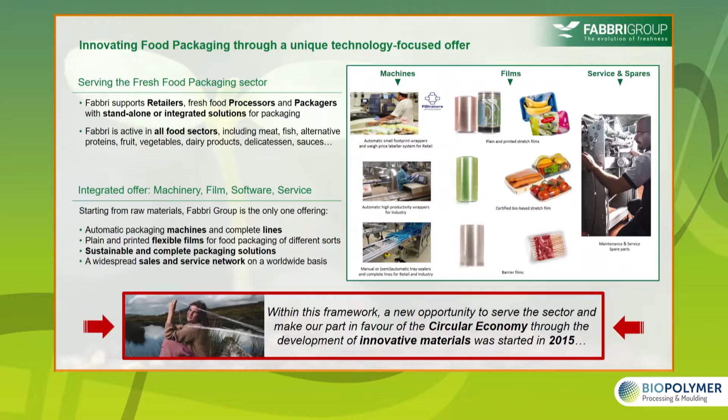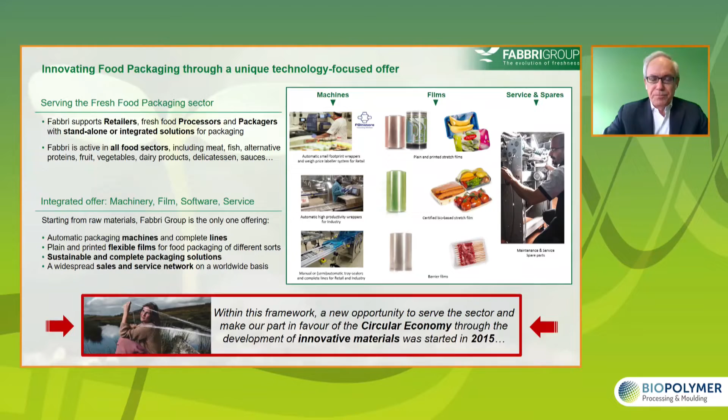And we do it with a full range of products for automatic packaging, as well as with plain and printed flexible films, among which we have been developing through time sustainable and complete packaging solutions. In this strategy, we considered supporting the circular economy with innovative materials, with a project that was started in 2015. We believe that we need to have a more sustainable solution, and for this reason we developed Nature Fresh.

What is Nature Fresh? It's a compostable certified cling film that can be used on our machines as well as those of our competitors. It's a film that is printable with compostable inks, has a very high water vapor permeability, even higher than traditional films, and offers full protection to the freshness and properties of the product, and therefore is ideal for any kind of fresh food. We have been developing this project with the support of the European Commission within Horizon 2020.

And here we see the Nature Fresh features and benefits. First of all, it is the first product on the market that is compostable certified for automatic and manual food wrapping. It respects all the standards of EN 13432 on a global scale, and it is also certified for home compostability. It uses a special grade of the polymer Ecovio developed by BASF together with us, and it helps to reduce or eliminate packaging waste.

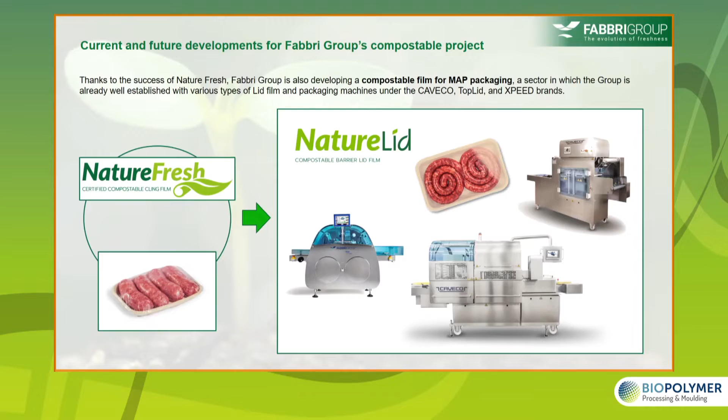Based on the success of Nature Fresh, we have now started to develop a new compostable film for MAP packaging, the second way of packaging fresh foods, made with our film and with our machines, especially from the lines Caveco, TopLid, or Xpeed. With this new film, we are already in tests with different customers and will be launching it in the next period of time.

Because we believe that together with traditional solutions, more innovative and sustainable films have to be produced on the market, and this will lead to a better understanding and better utilization of the circular economy.

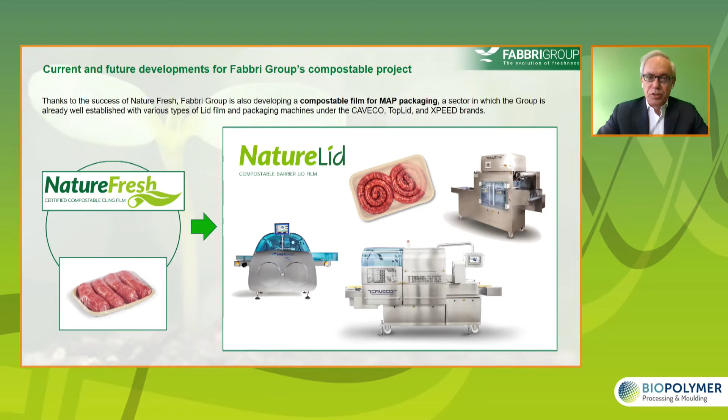Thank you, Stefano, for the review. We are happy that your idea is so well spread on the market and wish you all the best for the future. And now we are very pleased to announce the award winners.

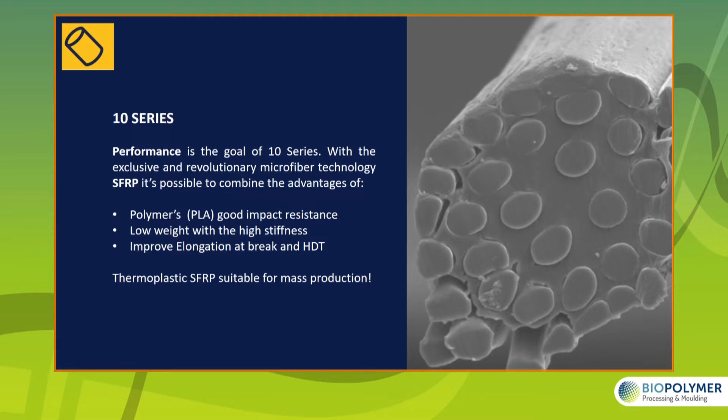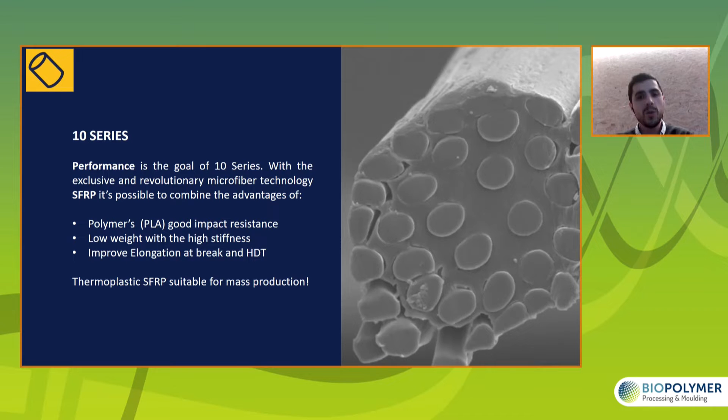Performance is the goal of the 10 series with the exclusive and revolutionary microfiber technology SFRP. It is possible to combine the advantages of polymers, PLA, good impact resistance, low weight with the high stiffness, and it can improve elongation at break and HDT. So thermoplastic SFRP is suitable for mass production now in ERT. A very important point is that the technology is already used in ERT in mass production.

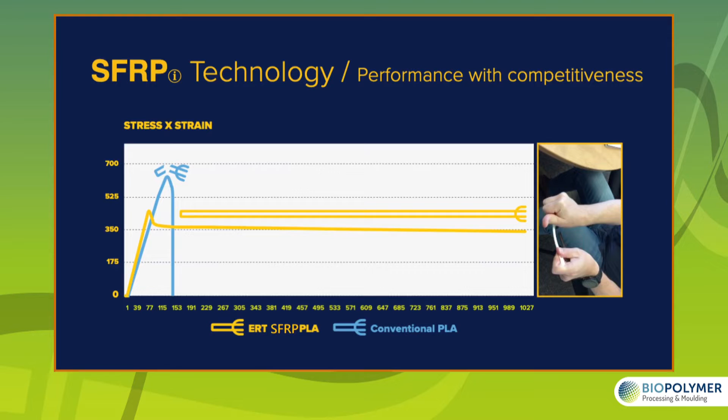In this slide, you can see a well-known graphic in materials engineering, the stress versus strain graphic. See in the yellow line the product ERT SFRP PLA compared to conventional PLA in the blue line. See that the yellow presents a high deformation and the blue line does not. Look at this example in this photo on the right.

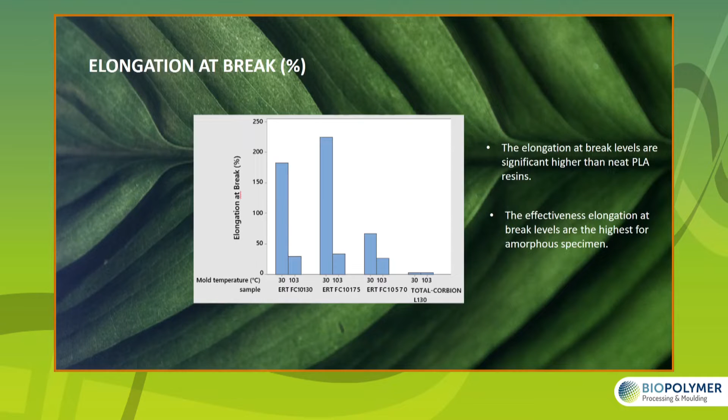Now I present to you images of our final product. So nice, simple and usual products, but with a really interesting technology inside, able to competitively enable PLA for use in these applications. Here are some properties that we were able to achieve with our ERT product compared to neat PLA from L130 on the right side.

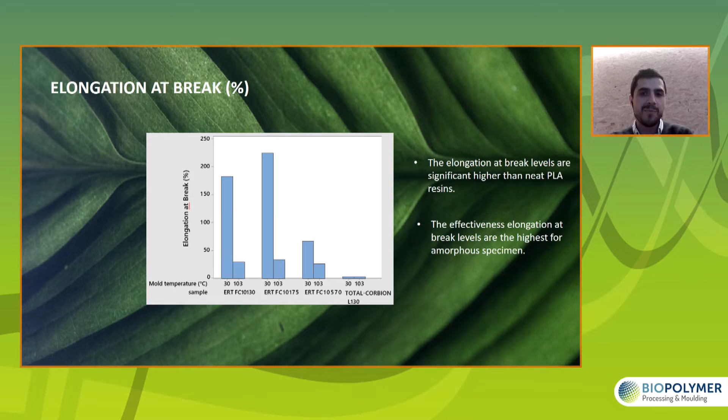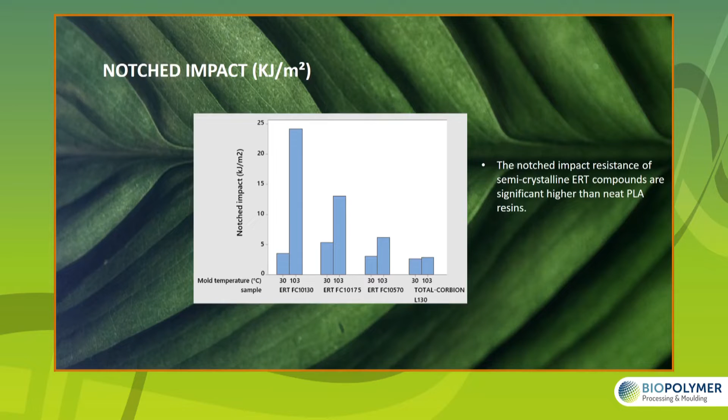Look at the significant increase in the strain at break of the ERT product in its amorphous state. Here is the significant increase in impact strength of the crystallized ERT product. Now, look at the heat deflection temperatures. Look at the HDT achieved by the crystallized ERT product.

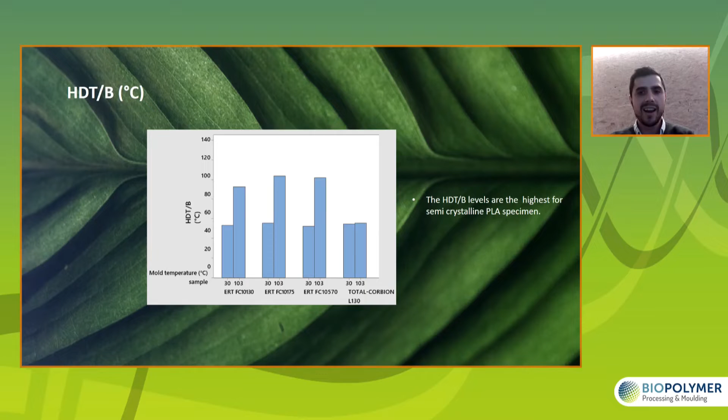So we are a biodegradable plastics company, but more than that, we are a compostable bioplastics company. See this example of biodegradation occurring in the second of the images on the right. This is one of the tests to comply with EN 13432, for which we are certified by the main certifying agency in the compostable field.

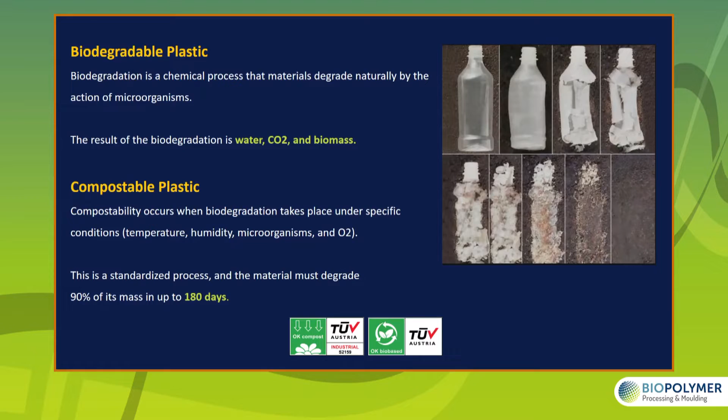It's called TÜV. So our products are certified by OK Biobased and OK Compost. It is confirming that our raw materials are bio-based carbon, and also final products have a compostable end of life.

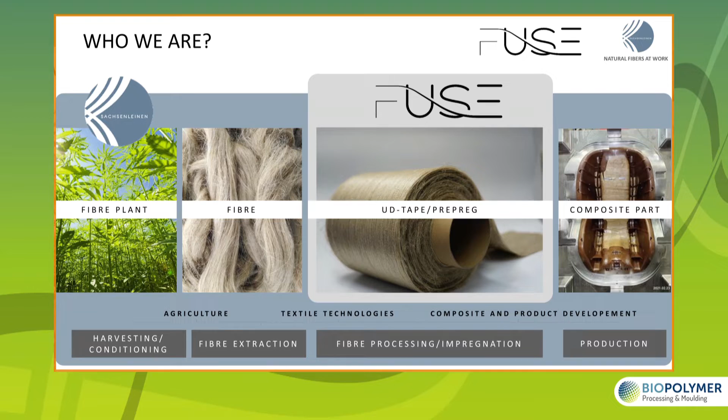Our big goal is to establish regional natural fibers in combination with bio-based plastics and technical applications, and thus contribute to drastic reduction of CO2 emissions in the composite market. Our core competency is to develop tailor-made fiber composite materials for lightweight applications, such as the FUSE UD tape with which we are nominated here today. Our focus is on hemp fibers, as they offer largely untapped potentials in terms of performance and price, and as well, many other high performance properties.

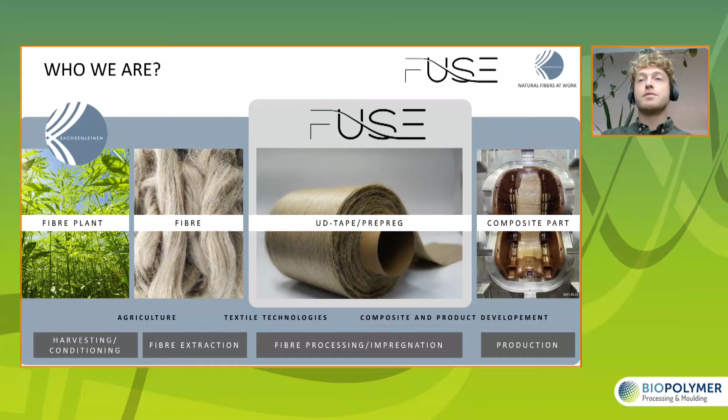But what means high performance in the case of natural fibers? What can such material systems achieve? The main focus here is on properties in which natural fibers are at least equal or even better than other materials. These are properties that other materials do not have, and thus bring them a unique selling point and special product characteristics. The following three aspects are outstanding.

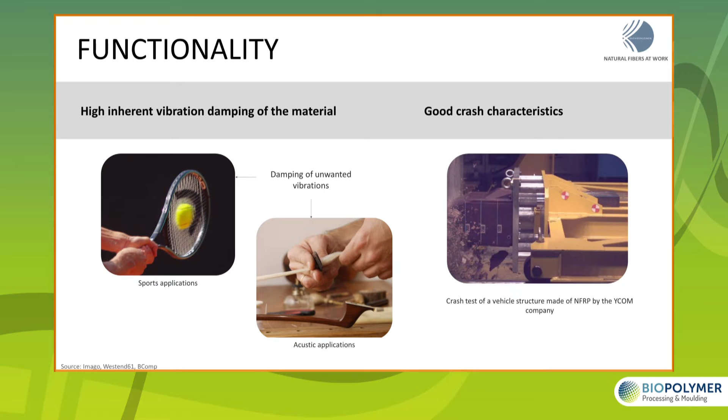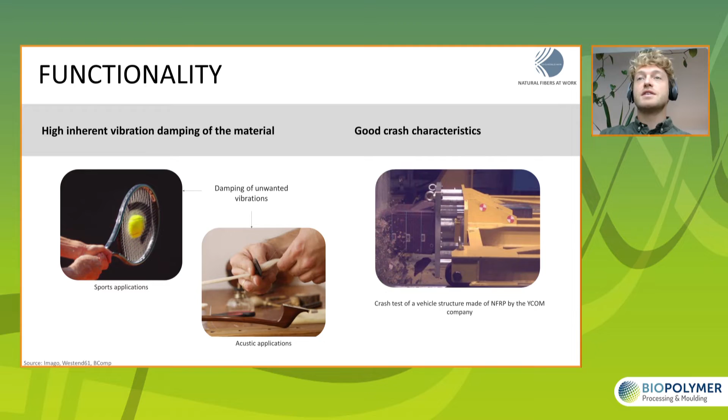First of all, the excellent damping properties of hemp fiber reinforced biopolymers. A component made of such materials has a 50% higher damping capacity for unwanted vibrations than a comparable glass fiber component, which is very interesting in dynamic or acoustic applications. But also the low splinter fracture behavior in crash-relevant components is a very advantageous feature.

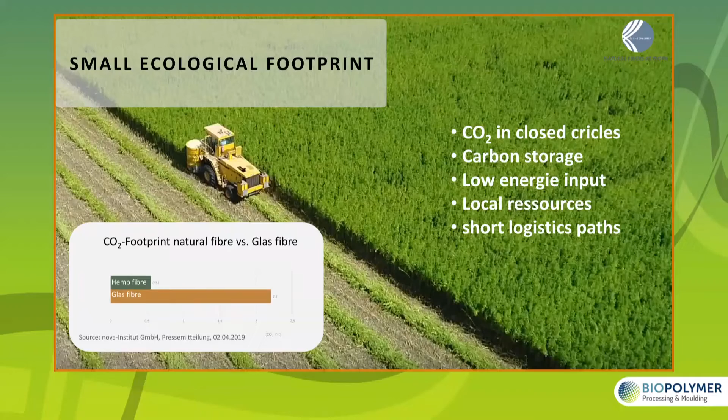The second big advantage is, of course, the sustainability of the materials. Compared to our direct competitor, glass fiber, we can demonstrate an 80% lower CO2 footprint. Bio-based fiber composites offer the possibility to keep carbon in closed loops and even store it for a long time in the products. Only little energy is needed for the production because the fiber grows in the field with the power of the sun. The use of local raw materials also helps to minimize energy-intensive logistic efforts, which increases the sustainability of our value chain even further.

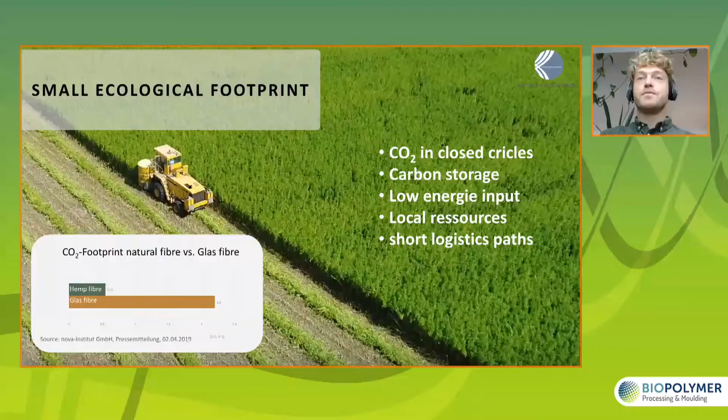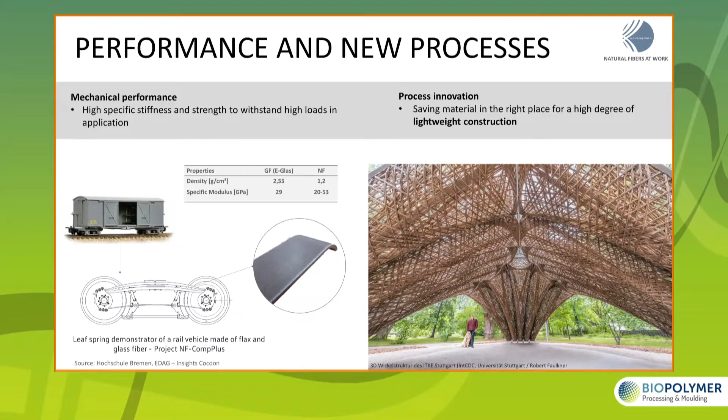But also the mechanical performance of biocomposites does not have to fear the comparison with its synthetic rivals. Due to the very low density of approximately 1.2 grams per cubic centimeter and the high specific properties, it can easily compete with the glass fiber composites, a clever construction and innovative design provided. Clever in this case means rethinking your products.

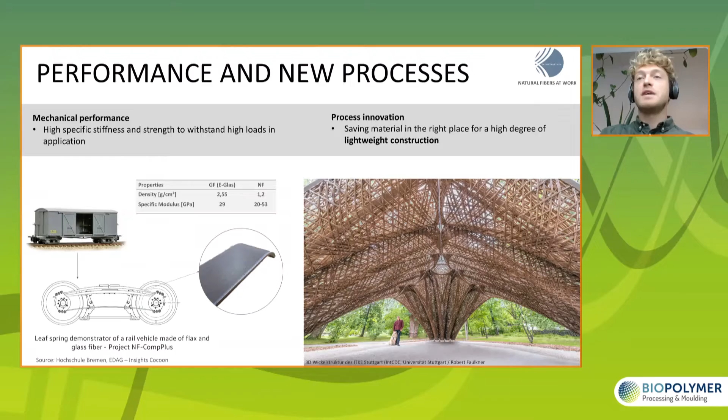You can compare this with the evolution that took place when steel was replaced by carbon fibers. It also took several years to reach today's perfection in component design. My favorite example here to illustrate this is the bicycle frame. Current high-end bikes have little in common with the steel models of 20 years ago. But the manufacturing processes are also changing. A good example is the coreless winding of the University of Stuttgart, which resulted in this pavilion made of natural fiber composites. But why do we still see so few products made of natural fiber reinforced bioplastics, even though the technologies and processes are available?

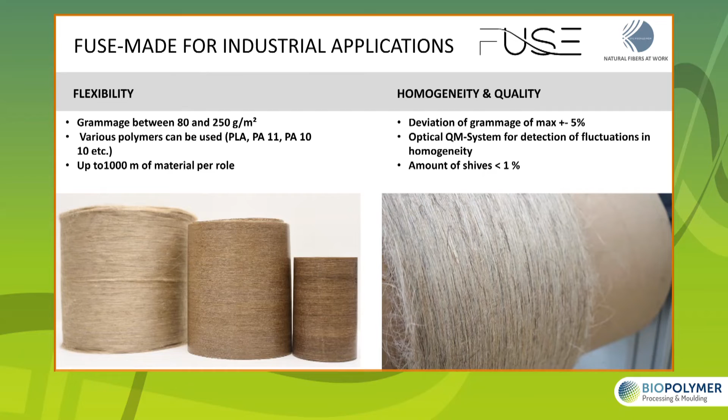On the whole, there are two reasons for this. Firstly, the high price of the materials, and secondly, the partly insufficient industrial suitability of the semi-finished products. Fuse Hemp Thermo was developed with the aim of solving exactly these two problems. We have developed a process that eliminates many steps in the textile process chain and sets new standards in the economics of bio-based fiber composites through high efficiency and flexibility. To put it in simple terms, we can reduce costs by up to 40% and at the same time respond very precisely to the requirements of our customers and their applications.

Fuse Hemp Thermo is available with variable grammages from 80 to 250 grams per square meter as a continuous surface with up to 1,000 meters per roll. Suitable fiber types are flax and hemp, but I would not rule out wool or pineapple fibers either. With the biopolymer, it looks similar. We have already successfully processed PLA and PA1010, and PA11 will soon be investigated.

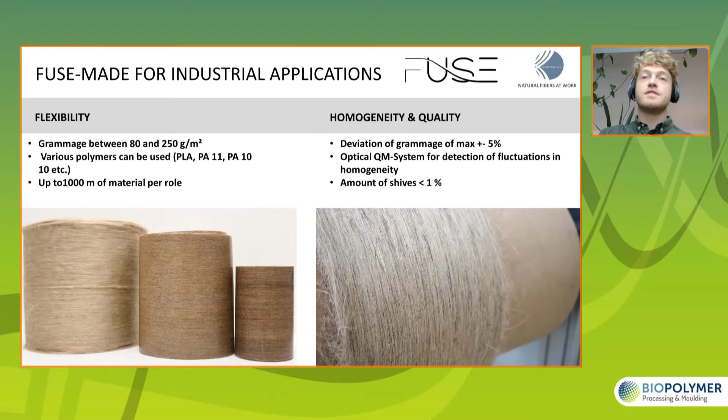As you can see, the sustainable materials of the future are already within reach. Now it's your turn as a user to bring them to market with innovative products. We can support you with this.

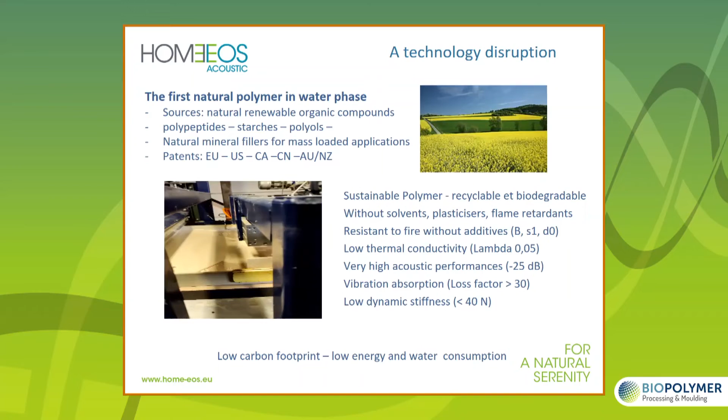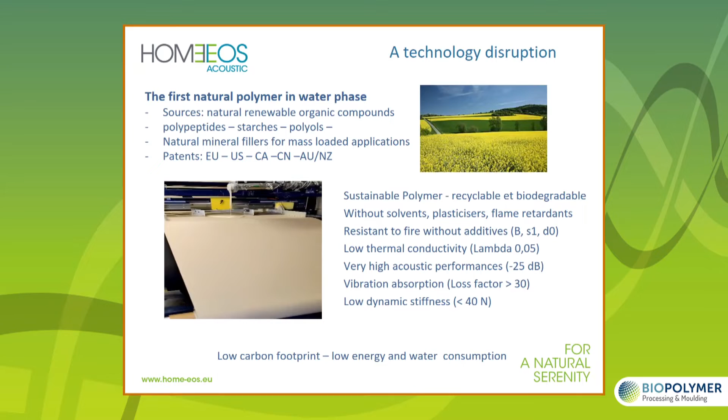A disruptive technology because it is the first bio-based polymer in a water phase. We use only organic compounds that are renewable, easy to collect from nature, and mainly based on polypeptides, starches, and polyols. We use also mineral fillers for the applications that require mass loading. And the technology is patented in Europe, US, Canada, China, Australia, and New Zealand.

These sustainable polymers are recyclable and biodegradable. They're made without solvents, without plasticizers, without flame retardants. Although they are resistant to fire, without any additive, and Euroclass B S1 D0. They also have a low thermal conductivity, so our lambda is 0.05. They have high acoustic performance and vibration damping, and a very low dynamic stiffness.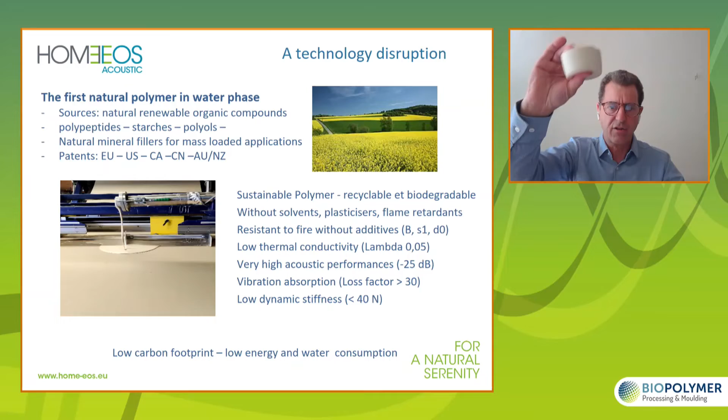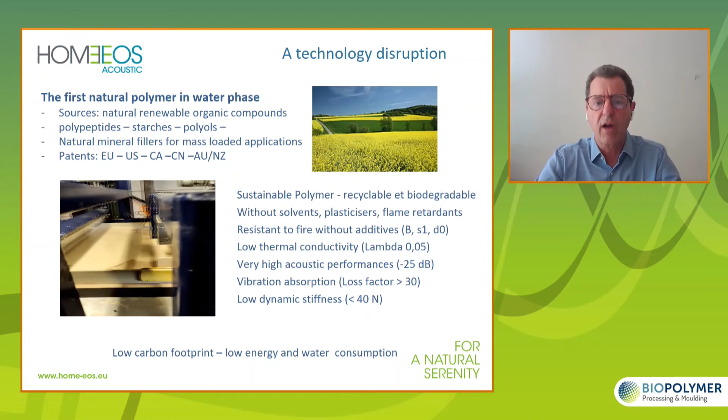So that viscoelasticity, as you can see on this sample, it's very easy to compress, a very soft material that is made through this technology. It's a very low carbon process that also requires very little energy. We can do a lot of different products with this technology. One of these is the acoustic membrane that we name Stop Sound. It's very effective against low frequencies. It reduces 30 times the transmission of noise and absorbs vibration.

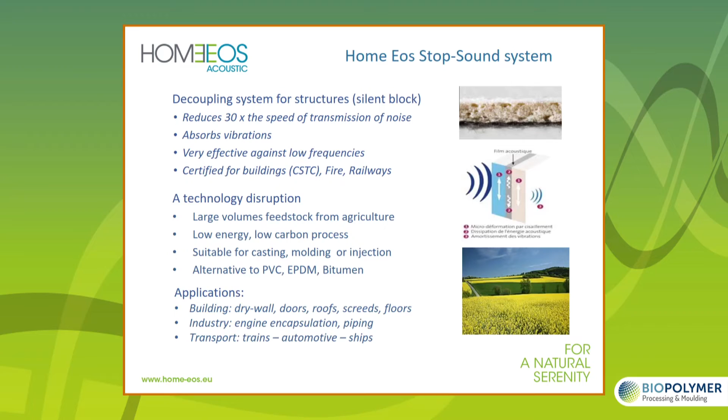The feedstocks that we use are coming from byproducts from agriculture. They're suitable in the form of polymer for casting, but also for molding and for injection. And today we sell mainly this product as an alternative to bitumen, PVC, and EPDM. The main applications are in buildings, drywalls, roof, partitions, screeds, flooring, in industry as engine encapsulation for noisy equipment or piping, wrapping. We also propose this material as a substitute for bitumen in the transport systems.

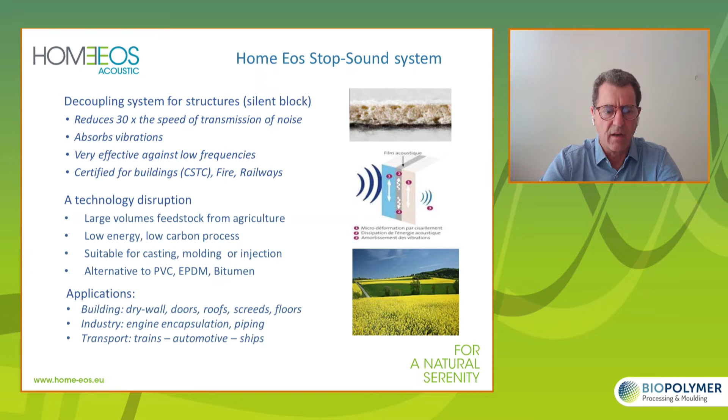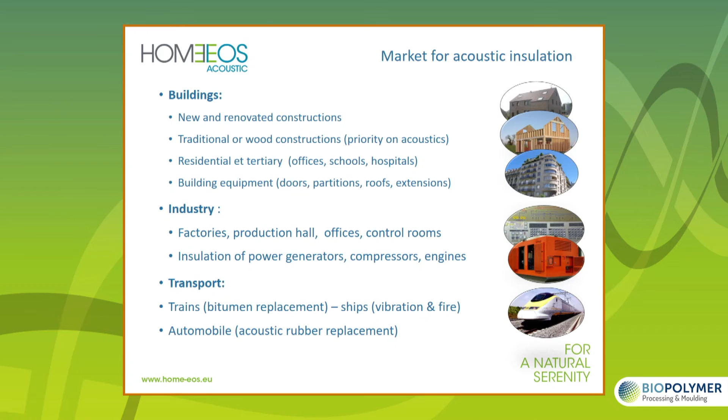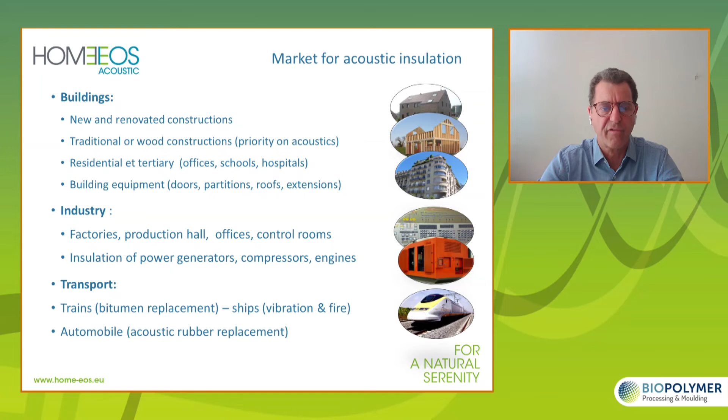In the building, the majority of the buildings that have a light structure, like wood construction, but more and more other sectors of the building will go for light systems, and providing additional acoustic performance is a must in these buildings. For factories, we see, for example, production office control rooms, insulating power generators, and in the transport system, systems like ships or trains or even automobiles are all looking for replacement for the rubber that they use today.